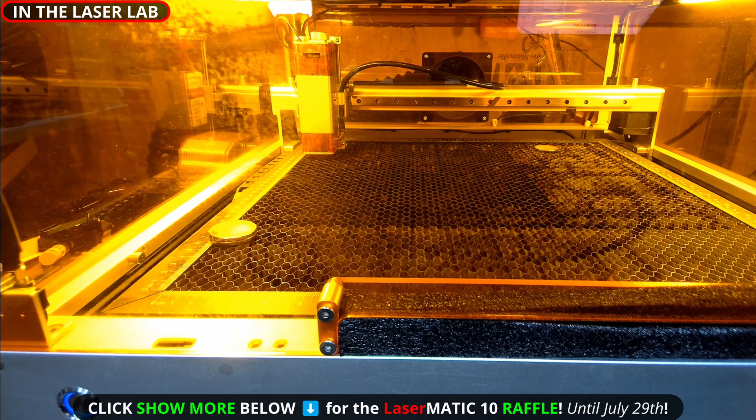So the reason why I'm doing this video today - anybody can do this, right? If you notice there, I'm using an Arial font and I'm making stencil letters. So this applies to stencils as well.

A lot of people have said to me over time that they want to do stencils, and I always say the same thing: well, just go download the stencil font. But it turns out people aren't really happy with that stencil font. So what I'm going to do today is show you how to take any font - today we're going to use Arial - type out some text, and make it into a stencil font easily and quickly.

So with that said, let's get started on today's project.

Okay, so I've gone through a couple of iterations of this now, let me delete this one off my screen. This is the second version, and I was trying to do a video on it, but I forgot to make the cutout go all the way across, so I screwed that one up. I'll get rid of this one - this is how doing these videos sometimes takes a long time.

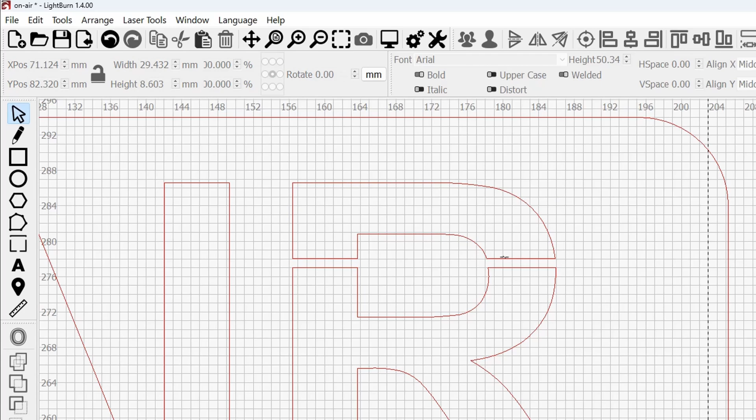So now I'm on my third version of this, and I've gone and adjusted these openings here to exactly 1mm. The way you can do that is cut out the opening, and I'll show you how to do that in a minute, then you can resize it right here just by dragging this up or down, selecting that one piece, either piece, doesn't matter. You can select one, move it halfway up, move the other halfway down to keep it proportionate.

What I did wrong on the A was slicing it, so let me show you now how to properly slice this. You want to connect the wood - this is wood over here, and this is wood over here. You want to connect it all the way across.

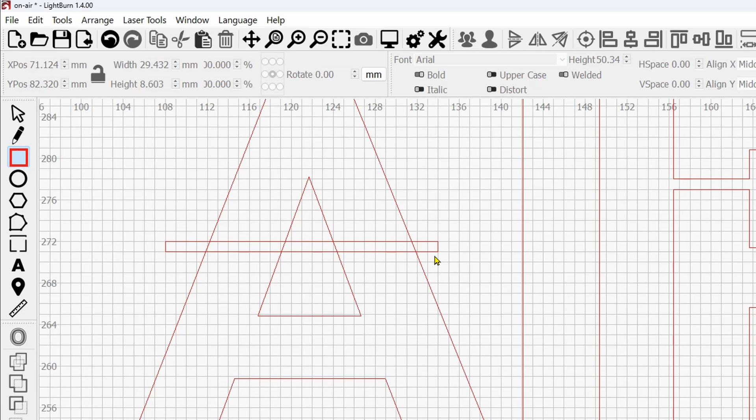So what we're going to do is draw a rectangle - grab a primitive up here on the top left side, draw out a rectangle 1mm tall all the way across like that, then we'll select it. Now what we'll do is size it to the size of the letter.

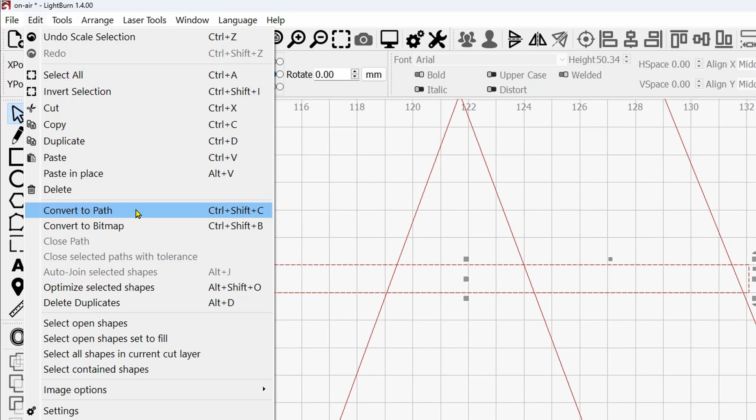Now with an angular letter like this, it's a little bit harder to size it. So what you have to do here, because you don't want these pieces sticking out on the side, is come up to Edit on the top toolbar, come down to Convert to Path, and click on that.

Now we can come over on the left toolbar to the Node Edit, and you'll see the 4 nodes for this rectangle appear. What we want to do is slide this node in to right next to the edge - it has to meet that line, but it can't go too far over beyond it.

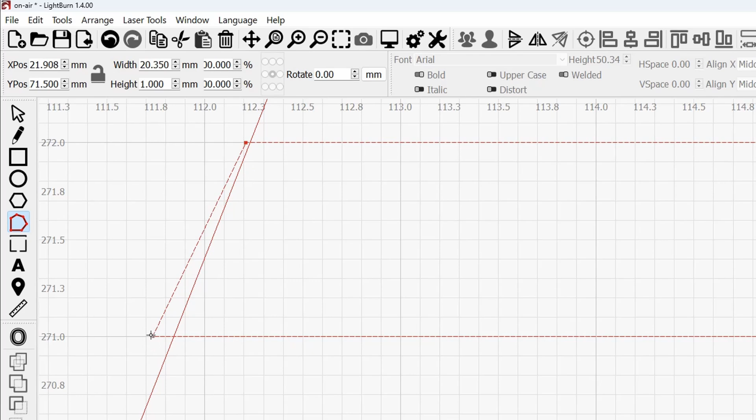So we're going to just bring this in to about there - let me zoom in to make this a lot easier. I'm going to grab this and bring it right into the very edge of that line, and then we're going to do the same thing up here on the top. I'm going to grab this one and bring it in right to the edge of that line so that it's unnoticeable to the naked eye.

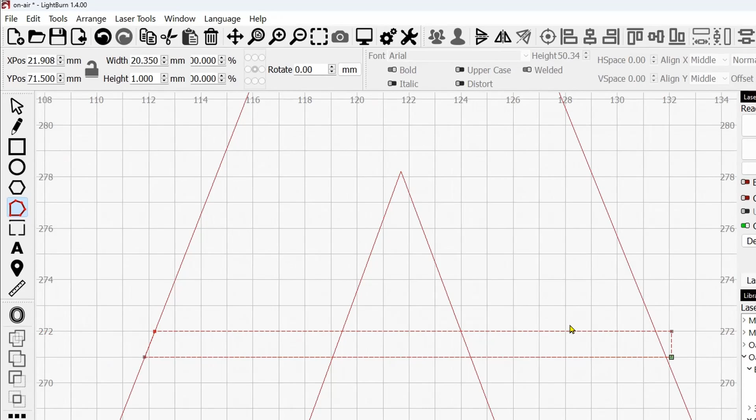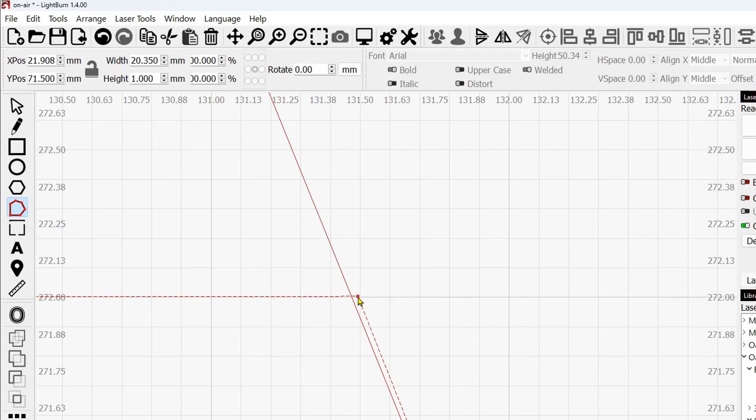And then on the other side we're going to do the same exact thing - we're just going to grab it and bring it right into the edge right there, and then we'll grab this one and bring this one in to the edge over here.

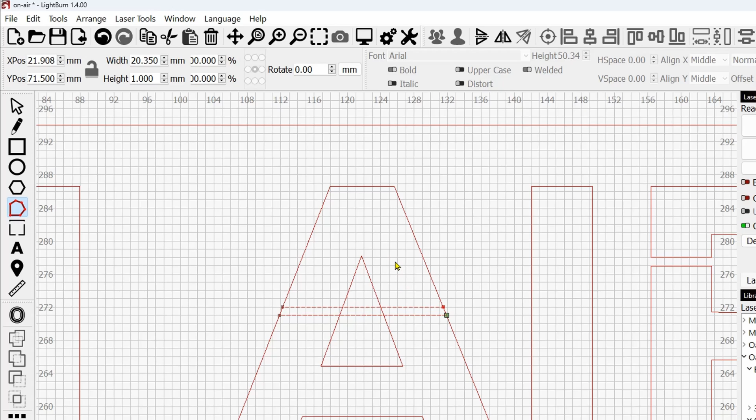Now I made the same mistake I made in the last video, which was drawing this rectangle only out to the edges of this wood here, so this wood was going to drop out. That doesn't help us. So now I have the rectangle going all the way across from wood over here to wood over here, and that's what we want.

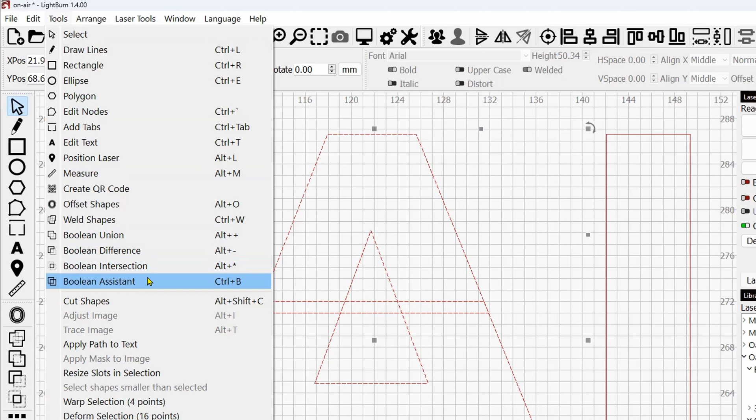Now we'll come to the selector tool, top left, and just drag over both of these. Come up here to Tools at the top menu, down to the Boolean Assistant, click on that, and we'll pass our mouse over the different functions until we find the one we want, which is A minus B. We're going to select it and say OK.

Now if we look at this, you'll see that the wood on this side goes all the way across to the wood on this side, and that will keep this center part of the A intact. We now have a military style stencil letter that will cut out perfectly without it being the actual military stencil font, so you'll be able to use any font that you want.

Let's jump over to the laser real quick. We already know our settings are all set up for this, so I'll go to the laser tab. I don't need to hit frame because all I've done is moved it down from the top. The original one was up in the top corner, the second one was in the middle, and I duplicated that and put the third one down here, and we are ready to run this job.

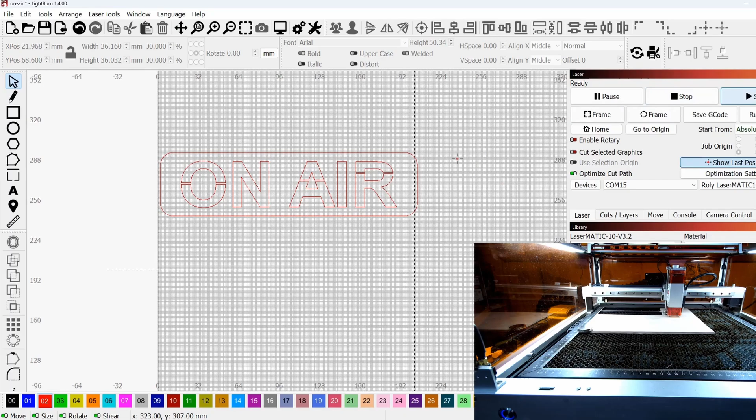Let's go ahead and hit start. And there we go, the laser is started. I will turn off my microphone now and speed this up so it goes a little quicker. Well, I guess rather than having the microphone off, I'll just voice over this a little bit.

For those interested, this is the Roly Automation LaserMATIC 10, a 10-watt diode laser. This job is running on 6mm white oak at 140 millimeters per minute at 100% power, slightly above the recommended cut for white oak in the Lasermatic 10 library, which is 120 millimeters per minute. But this oak is well dried, and I know it would cut at this speed. So those are just some stats on what we're doing here, but we'll get back to the video in just a moment.

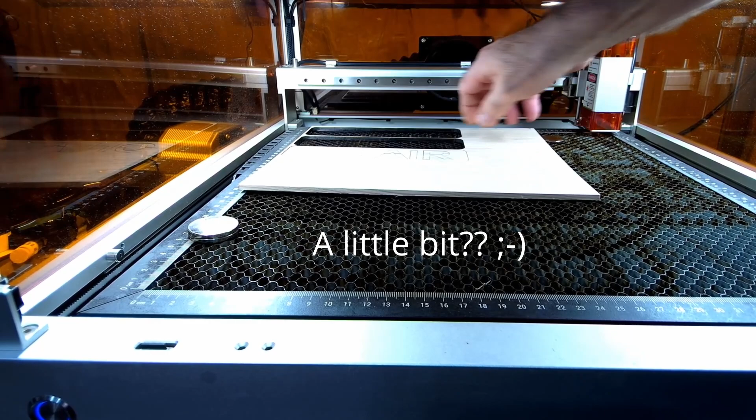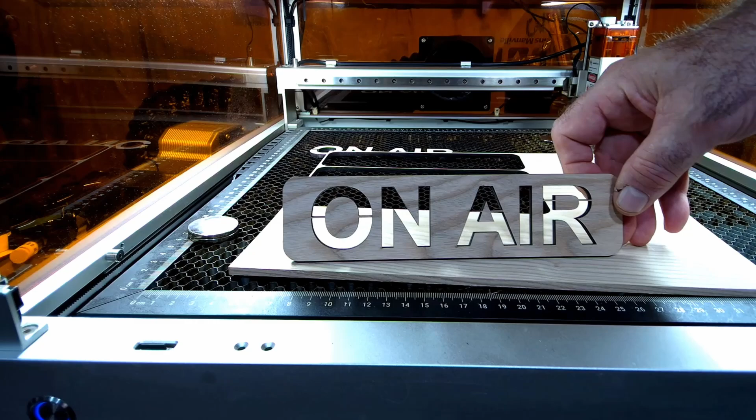So I did need to use some strategically placed magnets because this oak did warp a little bit. It was actually originally in a 24-inch sheet that I cut in half on this laser. You can see that the numbers I used are perfectly dialed in. There is the final product, and it came out absolutely perfect. I think this one is definitely going to be a keeper.

That's it, folks, that's the whole video. So you're probably wondering, well, how did it come out? Here is the final product on air, my little sign. I've got a couple other versions of this that I'm working on, as you can see down below, with wood and acrylic over there, but I'm not going to share those just yet. This particular one, all I did was take a piece of red cardstock paper and glue it to the back, and there is my final product on air.

So really easy way to create a stencil. You might want to just do this out of paper and create stencils you can spray paint with as well. I did it out of wood, I've done it out of acrylic. This is the easy way to take any font and turn it into a stencil font, doesn't matter what font it is, well, unless you get the crazy italic ones, that might be a problem. But most fonts can be turned into a stencil in just a couple minutes flat.